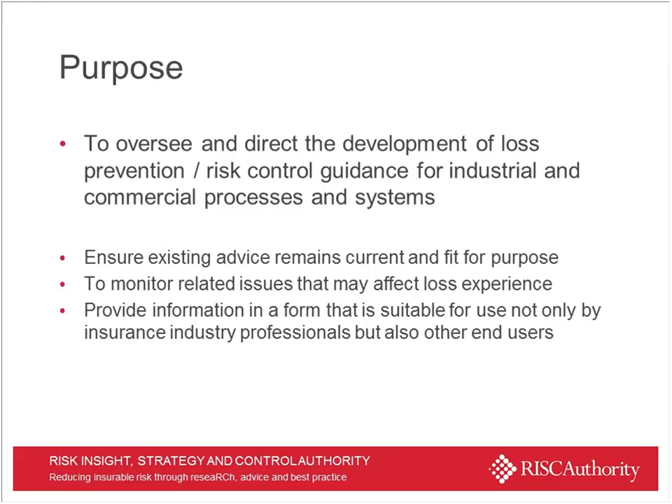Within the existing suite of documents that we have, there's around 57 current documents at the moment, numbered anywhere from 1 to 63, which seems a little bit strange, but the anomalies are due to a whole range of different things: numbering inconsistencies where we've renumbered some documents, and other titles that have been withdrawn or superseded and replaced. I've just got a few examples here.

RC2 was called Builders and/or Contractors Operations, and was last published in 1980, and the Joint Code of Practice for Fire Prevention on Construction Sites has very much superseded that.

RC20 A, B and C - a decision was taken that we didn't like A, Bs and Cs in particular in documents written in the past, so they've been renumbered as RCs 55, 56 and 57.

RC6 on the storage, use and filling of LPG in containers was withdrawn, and that's been replaced by another series of recommendations. And then we also have some other strange anomalies.

RC22, RC23 and RC24 just do not appear to exist. Now, if there's any old hands out there who may have copies of such documents, we'd be delighted to see them and find out what they were about. But everything we've been able to track down from our own records and from those we brought with us from LPC back in the dim and distant past seem to indicate that they don't exist.

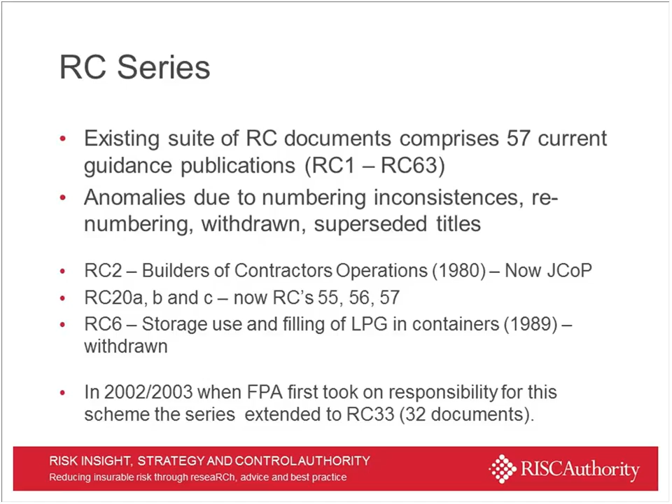Now, they're not hard and fast rules. Every insurer has the opportunity to append, amend, or do whatever they like with the documents if they choose to, and even if they, in some cases, tend to ignore them and just plough their own furrow, which is absolutely fine. But at the end of the day, we have some very, very useful guidance, all freely available, which hopefully the world and his wife can make best use of.

We also do other bits and pieces which fall outside of, I suppose, the direct risk control publications.

I've just highlighted a few on the screen now. One of the principal documents we're responsible for is the Joint Code of Practice for Fire Prevention on Construction Sites—one of the most widely used of our publications, and one we have to tread very carefully with. It's published jointly with the Contractors Legal Group, who used to be the Construction Confederation.

Yes, that is correct. They used to be the Construction Confederation, but they represent the contractor side of the market, alongside RISCAuthority representing the insurer side. There's an awful lot of liaison that goes into reviewing and updating that document to make sure it continues to meet the needs of both sides.

We have a business resilience guide which we published, that's now sitting with the business continuity working group, which Dominic convenes. We've got a code of practice for the protection of empty buildings, which we developed. There is fire risk management guidance for the food industry, published jointly with the Food Industry Panels Group. And we did a briefing note on e-cigarettes.

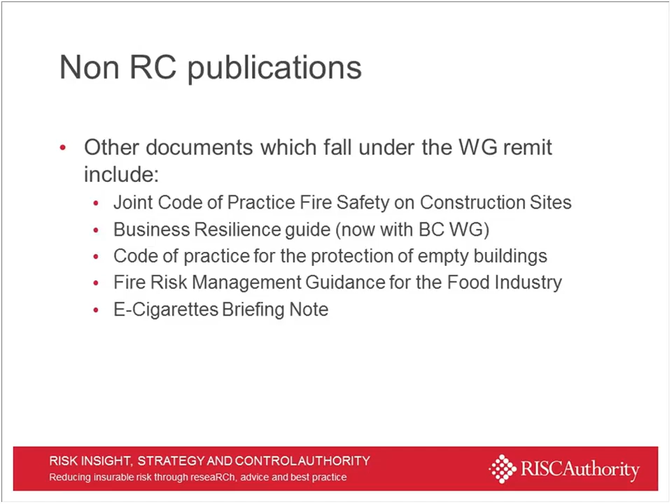We've worked with BSRIA on the extract duct cleaning risk control document. We've worked with BAMA on aerosols, BAFSA on the Legionella document, CFOA on the Photovoltaics document and on the Fire Detection Alarm Systems document, and also with London Fire Brigade on the document we produce on acetylene. So we try, wherever necessary and possible, to consult on these documents with the right organisations—not the world and its wife, but the right organisations—because we think that really strengthens what we publish in the end.

The document is really there as an aide-memoire for the steering group, so they can see what's current, what's not, what's going out of date, and what may be in more urgent need of attention. It's beautifully colour-coded just to make it nice and simple for me, which is always very helpful. It also allows us to respond promptly to emerging issues, because we can look at where we are with certain things, what the programme looks like moving forward, and ensure we're tackling things in a timely way.

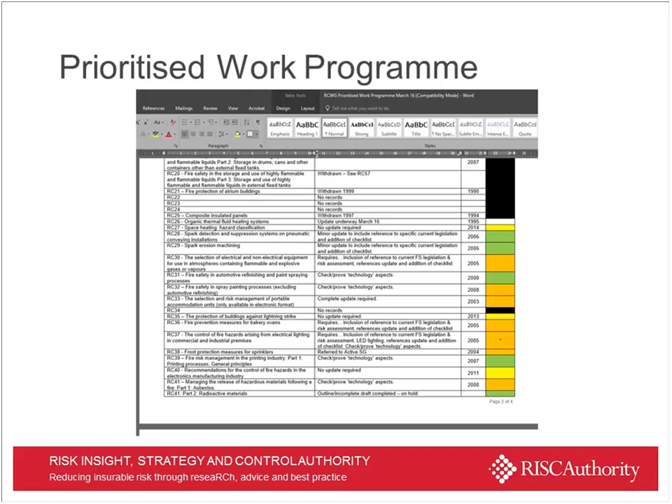One of the real difficulties that we have, although I think we manage it reasonably effectively, is balancing the need to keep existing RC documents up to date, whilst at the same time developing new ones that deal with emerging issues. So just looking very quickly at some of those we've been working on recently and have recently completed: fire safety with PV panels.

I'll be talking in a little more detail about that momentarily. That's correlated with the current IET guidance. There are also recommendations for minimising impact of Legionella on firefighting systems, which I mentioned earlier, and recommendations for storage, use and handling of industrial gases and cylinders. That's recently been updated and was passed for press this week, as was a revised version of RC49, which deals with acetylene cylinders involved in fire.

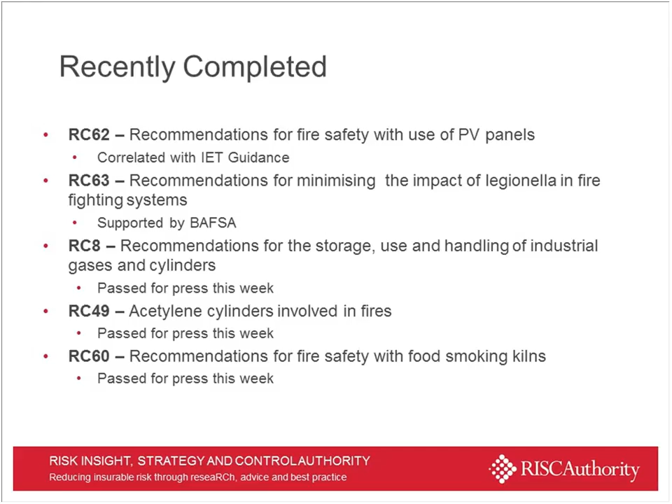And again, I'll touch on that a little bit later. Then we have RC60, which is recommendations for fire safety with food smoking kilns, and again, that's another one that was passed for press just this week.

Other documents that remain in progress, both new and those existing being updated: we have fire risk assessment of catering extract ventilation that needs to be amended to reflect changes recently made to what was HVAC. They're now called the Building and Engineering Services Association, but they have a publication called TR19, which is a sort of industry bible. So we need to reflect within RC44 the changes that have happened there. There's one other issue which I'll touch on in a moment.

RC64, manufacture, storage and use of biomass fuel pellets. We've approved the proposal for that, but we've yet to start any work. One of the issues is that we're waiting on the publication of an ISO standard, which we need to tie this into, and without it we'd probably be taking a bit too much of a punt, really.

We've got a document for fire safety in 3D printing. We've looked at the initial draft internally, and that's just being updated before the working group get an opportunity to review it formally.

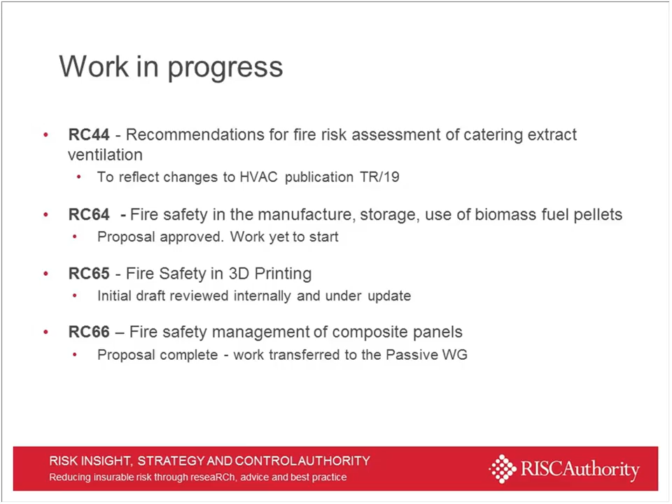And then RC66, shed a little tear for this one, an idea that was proposed by the risk control group, but has now been sucked away by the passive working group to develop. I'll touch on that very briefly a little bit later, just to rub in my indignation.

Okay, other documents in progress and documents that we've prioritised for update. RC26, Organic Thermal Fluid Heating Systems, bit of a mouthful, but not one of the longest titles we have.

RC15, Use of Portable and Transportable Space Heaters. 37, the Control of Hazards from Electrical Lighting. And then RC61, which is a relatively new document in real terms, but it covers recommendations for battery hazards.

But it's been suggested that it probably needs another look, on the basis that issues with regard to lithium battery hazards seem to have become more prevalent recently, and you've probably seen some of the news reports and videos that have come out.

So we're just looking at the need to update that to make sure it's current and remains fit for purpose. And then there's one new document proposed quite recently, which was fire safety with electrical cables, also considering firefighter safety. We looked at that proposal at our last meeting and agreed a way forward with it.

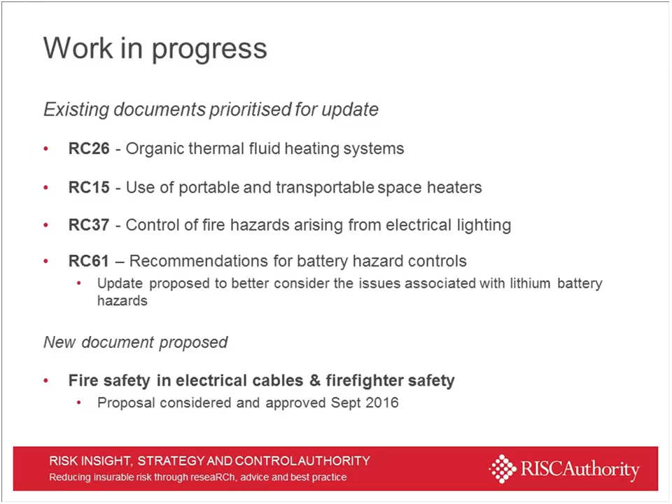Some of the other bits and pieces that we're involved in, not just production of documents: kitchen extract ductwork cleaning has been something of a concern for the steering group for quite a while, and we published a document on fire risk assessment for cleaning of extract ductwork, particularly from kitchens, which I referred to on an earlier slide.

However, we've been working with Loss Prevention Certification Board towards a certification scheme for extract ductwork. Progress so far: they've done all the research trials, they've developed the draft document, it's been out for consultation, and they're now just considering internally the validation of that document and its availability more widely.

I'm sure you're all familiar with the concerns associated with kitchen extract ductwork and fires therein. We're aware that there is an existing scheme for certification of cleaners of kitchen extract ductwork, which is held by the Building and Engineering Services Association.

However, research done outside of RISCAuthority indicated that a number of fires caused or resulting from build-up of grease in kitchen extract ductwork were as a result of poor cleaning done by some members of that particular organisation, and so the decision was taken to look elsewhere for developing a better scheme.

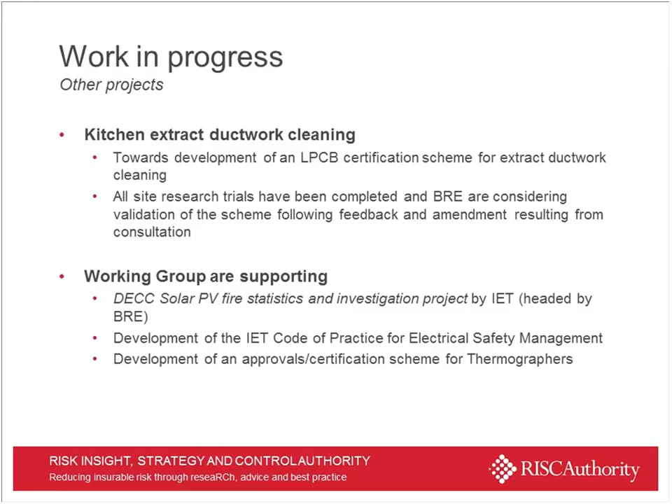Okay, so moving on from the generally good stuff that we do and how we do it, I just wanted to take a quick look at some of the more recent documents that we've published and those that we're working on at the moment, just to give you a feel for exactly what they are and what they cover.

I'm not going to go into too much detail, but hopefully give you a feel for each of them. RC62 covers recommendations for fire safety with photovoltaic panel installations. This was really developed on the basis that while the government were offering such great tariffs for the sale of electricity back to the grid, it became a very popular installation, and the work was being undertaken by rafts of people who may not necessarily have had the right qualifications, experience or competency, and there was very little guidance available to support them and the end users in ensuring their installation was fit for purpose.

I think it's given us an opportunity to look around the issue in more detail and come up with some really good guidance that supports not just their design and installation, but also their ongoing management, and also considers the risk to firefighters, which I think is very important as well.

So it provides background information and guidance on the installation of panels on commercial and industrial premises. The recommendations may be just as relevant to some larger domestic installations, but primarily it's focused on commercial and industrial premises, and looks at things like location and fitting, electrical safety, particularly where it has an impact on the prevention of fires, the mitigation of threats to life and property loss, and also business interruption. Safety of firefighters, as I mentioned earlier, particularly associated with the direct current side of the installation. I'll touch on that in more detail in a moment.

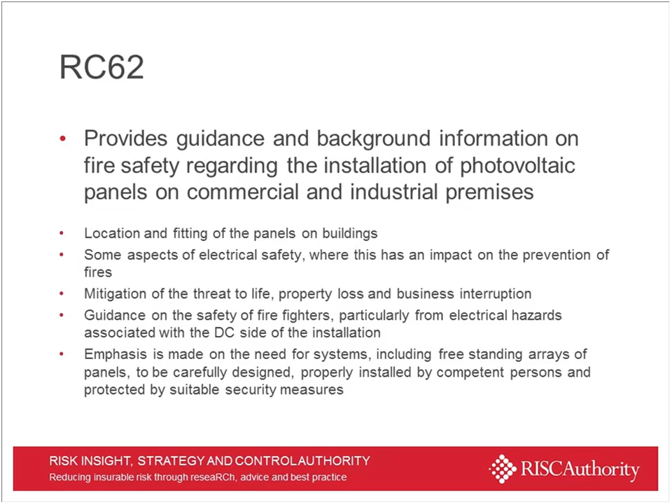There's also an emphasis on the need for systems, including freestanding arrays, because they're not always installed on buildings, but sometimes on large rural sites, to be carefully designed, properly installed by competent persons and protected, because clearly the panels are worth a few bob, or certainly the materials they're manufactured from are.

Some of the key points around planning, for example, is to review existing fire risk assessments, because just putting a series of panels on the roof of a building may not seem to be a particular issue from a fire safety perspective. If the fire risk assessment, which is driven by life safety requirements, doesn't address them, then it probably needs to - not just because you're putting stuff on the roof which may impact firefighting, not particularly a concern from a life safety means of escape aspect, but certainly if you're going to start drilling holes in buildings to run cabling, or breach compartment walls or compartment lines, then that needs to be addressed.

There's also a recommendation to review any assessments made under the Dangerous Substances and Explosive Atmospheres regulations, on the basis that the installation of PV is going to require consideration, particularly with regard to the zoning of the site and the use of EX-rated equipment.

When it comes to design, obviously economics would recommend the largest possible installation, but we felt it was appropriate to make sure that where they're installed on roofs, adequate access is maintained for maintenance and any other works that need to be done on the roof. It's great to cover your roof with panels, but if you can't get up there to maintain them or do any essential maintenance to the roof of the building, then clearly that's going to cause problems.

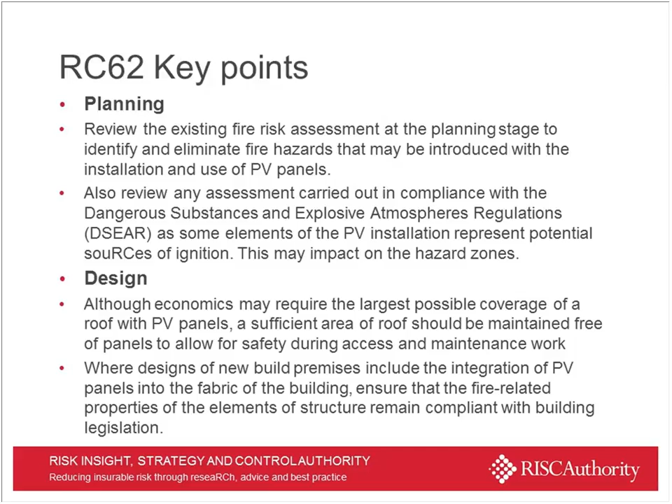When it comes to safety, provision of a switch in a prominent location which is easily accessible so that firefighters can disable or isolate the DC side of the panel system, to ensure their safety in real terms.

Also be aware that the panels produce current not just from daylight but also from other light sources, such as street lighting or flood lighting. There were a number of instances where installers working hard to install as many installations as they could while the feed-in tariffs and government funding were good, worked all hours using floodlit sites. Some were unaware that flood lighting will also create a DC charge through the panels, and a number of people got hurt as a result.

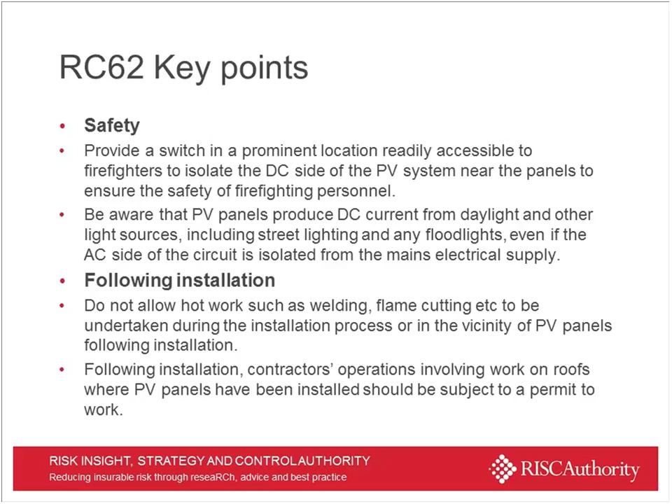And then, following the installation, recommendations with regard to hot work - any work on roofs should be subject to a permit to work system, for obvious reasons.

Some of the other issues addressed in the document: ensuring that unprotected cables and the panel arrays themselves don't straddle compartment walls. So if you've got a compartment line running up through a building with appropriate fire breaks at roof level, you've got to ensure we're not bridging that gap with the installation of panels or cabling.

Consider during the design phase, if you're installing large panel arrays in agricultural land or any external ground location, that the site's not likely to flood. Also consider roof loadings.

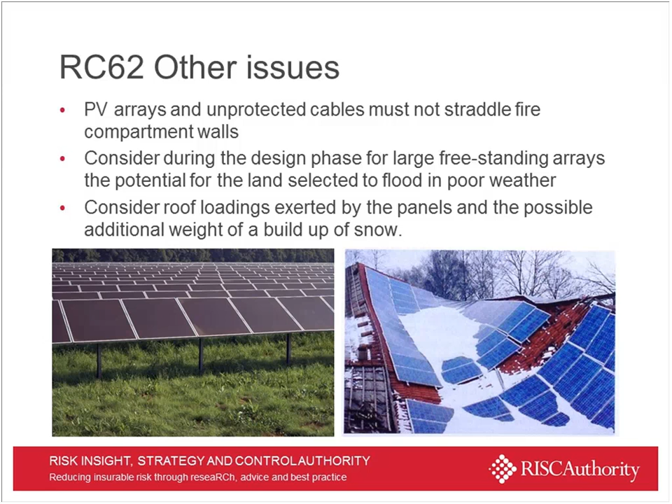Just adding panels to a roof may be enough to cause it to collapse or at least weaken it. And certainly if it snows, that can add additional load, which, as you can see from the photograph on the right-hand side, caused this particular roof to collapse.

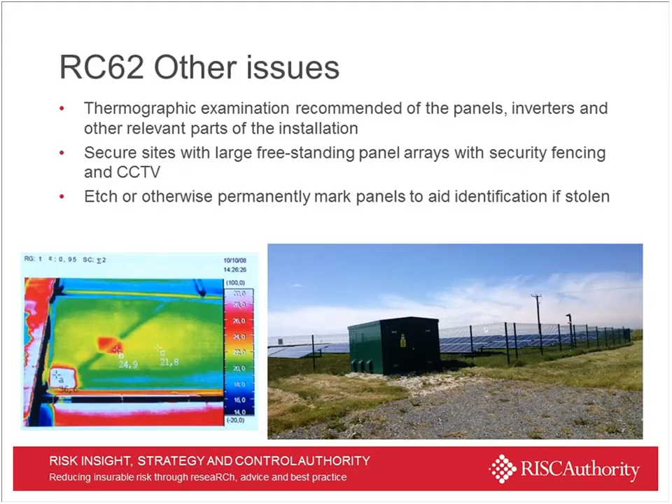We've recommended thermographic examination, as you'd expect, not just of the panels but the inverters and other relevant parts of the installation. Securing large sites with freestanding arrays using security fencing and CCTV, and also marking panels to aid identification if they're stolen.

When it comes to the fire and rescue side of things, we've also got to consider the fire resistance of the building and the potential for firefighters to get hurt and their ability to tackle the fire effectively. We talked earlier about the potential for banging holes into the walls of buildings and the problems that can cause by allowing fire to spread internally.

But externally, if you're piling panels on your roof, a firefighter squirting water onto it is just going to find the water bouncing back away from him, not necessarily getting to where it needs to get to. So we have to ensure there's appropriate access and that information is provided to the fire and rescue services so they know what they're walking into.

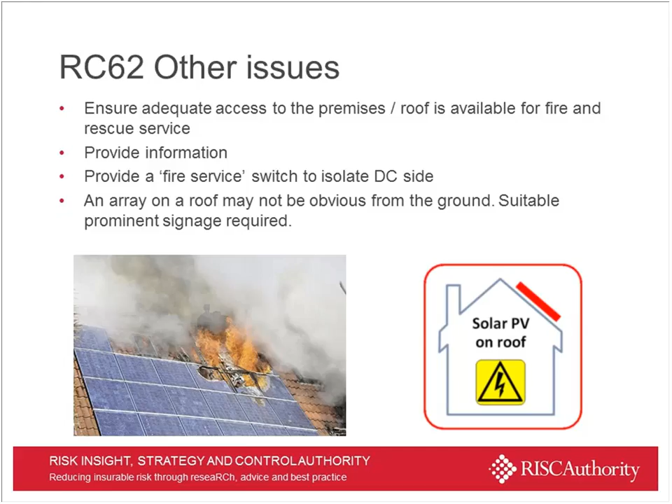Providing a fire service switch to isolate the DC side, as was mentioned earlier. And because the array on a roof, particularly a flat roof, may not be obvious, providing appropriate signage so they can easily and quickly identify that there are PV panels on the roof.

So a quick run through of that particular document. I'm going to look very quickly at where we are so far with RC60, just passed for press.

This covers fire safety with food smoking processes. Quite obscure - I wouldn't suggest it's an interesting read, but like most of our risk control documents, if you don't need them for the technical content, they're a surefire cure for insomnia.

But these recommendations are simply about providing advice for food smoking, both in modern factory settings and also with traditional kilns. Again, we're talking about the more industrial side of the market than the local home smoker - not sure if that's the term you'd use, but I've made it up if it isn't. It's just about good management of a process that involves the generation of smoke.

You might think there's not too much to worry about there, but from a fire safety perspective and the potential for false alarms, clearly if you've got smoke in the workplace, you've got problems that need to be considered.

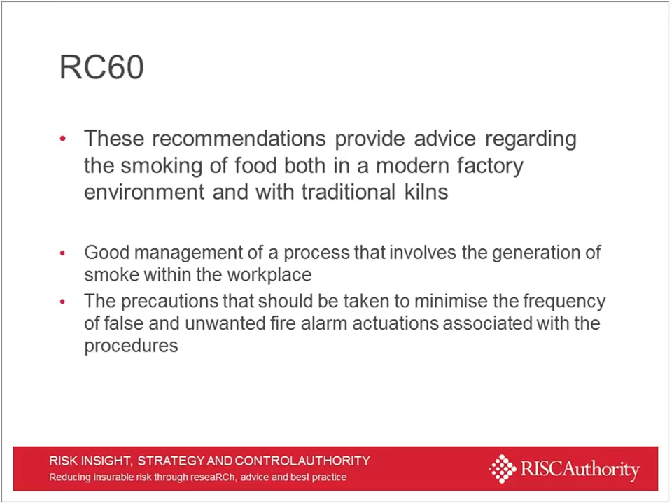A diagram there shows the essential elements of a smoke box. I don't think all of them are necessarily in a configuration that you'll always find, because in some locations you're going to have heating elements that sit beneath the smoke box itself. But you can see from this layout, and this diagram's reproduced in the document itself, you produce some smoke, pump it through a chamber where the foodstuffs are hanging, then you suck it out and blow it away, in the simplest of terms.

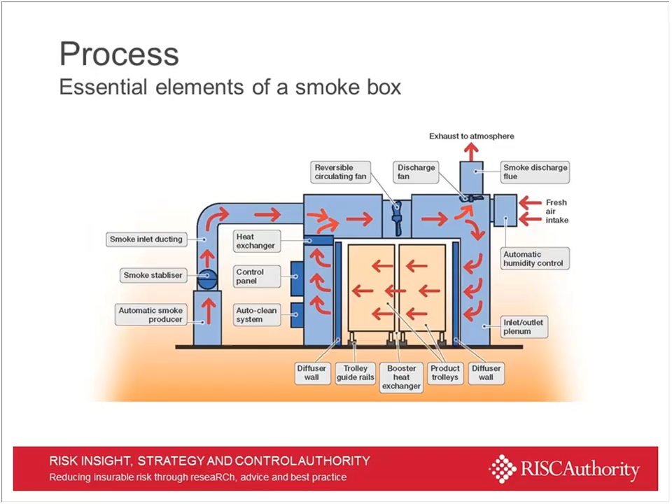In this configuration, you've got fans which can work in either direction, either to bring fresh air in or extract and exhaust the smoke to atmosphere once it's not required. So relatively straightforward, but that's an indicative layout, not necessarily what you'll find everywhere, but at least it gives us a bit of a feel for how these things function.

The key points are about compliance with the law, not just a traditional life safety fire risk assessment, but also considering the potential for explosive or flammable atmospheres if carbon monoxide is given off through the storage of fuel pellets. And then looking at business continuity, making sure that you've taken all the necessary steps to manage and maintain the premises so that it remains safe and business can continue even in the event of a problem.

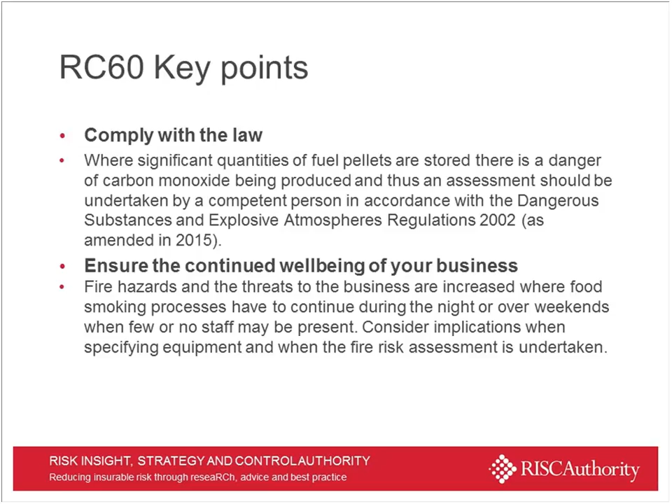With smoking processes, some of them do continue while premises are unattended, overnight or at weekends, so implications in that respect have to be considered. We do have a risk control document number 42, which covers unattended processes, referred to a couple of occasions within this document to drive people towards some specific advice which will assist.

When it comes to the key points, the fire safety management issues, relatively straightforward, the sorts of things you'd probably expect to be there: keeping the stocks of materials in the processing area to a minimum, training of staff, locating the equipment preferably in a separate fire-resistant compartment, and agreeing the fire rating of that compartment with insurers.

Where you've got fuels, you should be storing those outside the building and only keeping sufficient materials inside for what you need on a daily or shift basis. And when it comes to the ductwork, exhaust flues and ventilation and such like, construct them suitably, making sure that you're not producing a grease trap, as there's not the potential for huge amounts of grease with certain types of processes, but with some others there certainly will be.

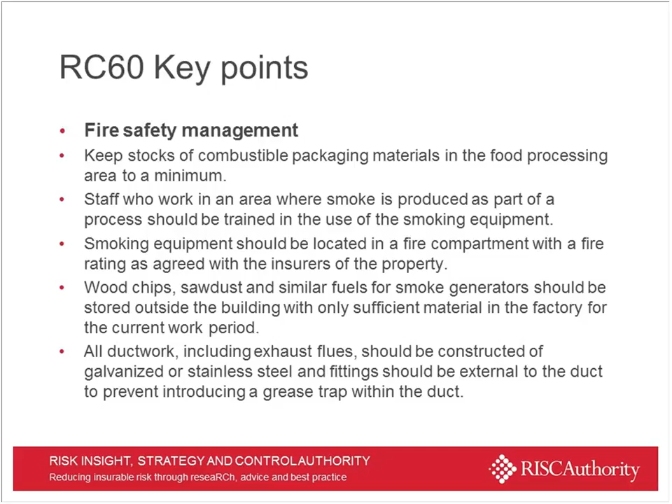And when it comes to the storage of the wood chips outside, if you're keeping quantities of them, you probably also need to consider the risks from self-heating and the potential for spontaneous combustion.

With traditional smoking kilns, where they're installed within a factory premises or built into a factory premises, they need to be located preferably on an external wall and open directly to the outside rather than internally. This helps to provide suitable subdivision. And again, when it comes to the fire resistance of the structure which surrounds them, recommendations are that the rating is agreed with the insurer.

It'd be nice to think it was relatively straightforward, but I think there are wider risk issues which need to be addressed rather than just prescribing something off the cuff.

Then with regard to fire protection, making sure that suitable detection is provided, ensuring that preferably multiple sensors are used, or those that are able to detect multiple phenomena, including smoke, heat and carbon monoxide, on the basis that what you want to try and do in a potentially smoky environment is reduce the potential for false alarm activations. Yes, the smoke box might be shut most of the time, but on opening the doors there's bound to be a release of some smoke into the wider workplace.

Having high temperature alarms in ductwork, exhaust flues, the smoke generator and the smoke chamber, just to make sure that if there is an incident, a fire or any significantly increased temperature, that's addressed quickly.

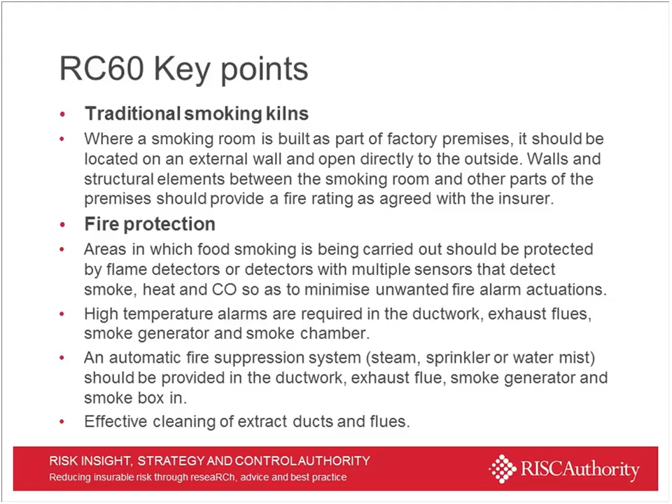Again, the build-up of grease may be very different depending on what's being smoked and the process, because cold smoking will produce far less than hot smoking would do, but it still needs to be considered in the round.

The third document to talk about is RC65, Additive Manufacturing, I've titled it. But as you'll see from the image, what we're really talking about is 3D printing. This is one of those emerging technologies that the steering group felt it was right to address now.

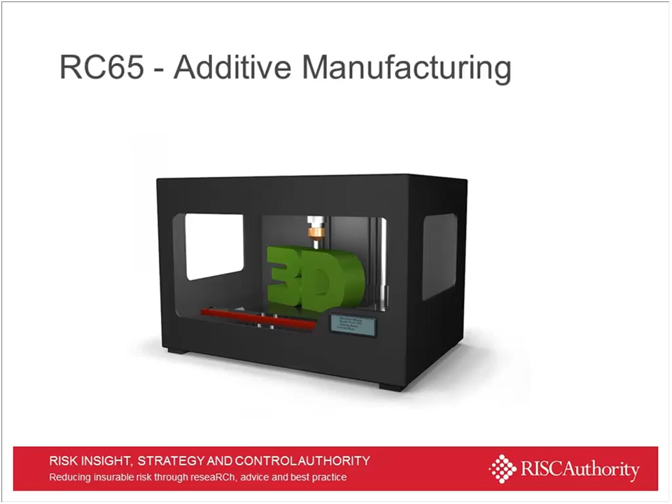Now, with any new document of this nature, there's a decision to be made. You recognise that you're producing something that's correct for a moment in time, but where there's a technology that's moving quickly, you also have to realise it might go out of date very quickly as technologies emerge. But 3D printing's been around for quite some time, and some of the technologies are quite well developed and advanced. But it is one of those documents we will need to keep on top of. If we were to leave it as just a generic type document, it would cover very little more than what you do with an unattended process involving electricity and combustible materials. But I think the document's going to develop to consider some of the specifics associated with the different types of processes, and I'll touch on those in a few moments.

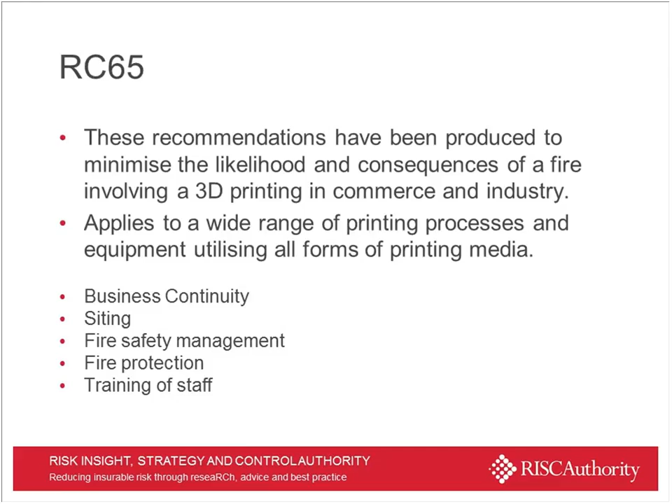The document covers business continuity, siting, fire safety management, fire protection, and training of staff as the principal issues. But looking at it in more detail, what's the process about?

Well, originally 3D printing, or additive manufacturing, described a process that deposits a binder material into a powder bed with an inkjet printer head, layer by layer. More recently, the term's been used to encompass a far wider variety of additive manufacturing techniques. They generally, nowadays, build components by depositing thin layers of material and fusing them together by heating, often by the use of lasers. The building material is typically fine, such as powdered metals, plastics, ceramics or glass. But the technology used by most 3D printers today is fused deposition modelling, where you're building something from the ground up on a flat bed, although there are other ways of doing it, and this deposition modelling is a special application of plastic extrusion.

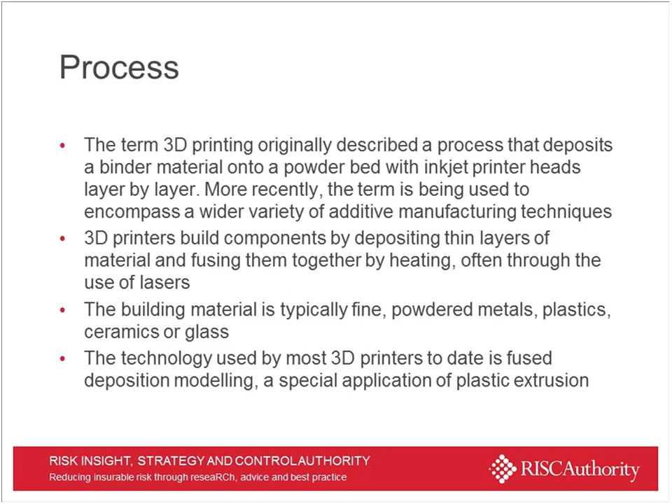Using edible materials, even for some manufacturing, but there are also products like metal alloys, powdered polymers, titanium alloys. So using powdered metals, using powdered plastics is obviously going to cause the potential for significant risk from something quite obtuse like a dust cloud explosion if the materials are allowed to mix freely with air, and so those sorts of things will also need to be addressed. Under robocasting, or direct ink writing, they use a product in some circumstances called Cermet, which, as the name would suggest, is a composite of a ceramic and a metal. Not necessarily a space age material, but certainly one they're thinking of using to line spacecraft to shield them from debris, but more traditionally used in producing electronics, electronic resistors and capacitors and such like.

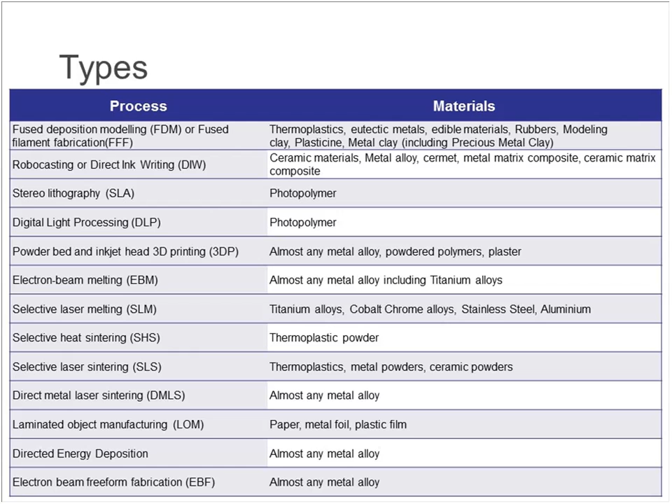So clearly, if you're using powdered metals or powdered plastics, there is the potential for dust explosions. There might be the need to hazard zone the space, and the need to use EX-rated components. If somebody's installing a new 3D printer into their premises, is that the kind of thing they're likely to consider? Maybe not. Principal risks are, because it's an unattended process, the potential for malfunction of the machinery itself.

As a steering group, we had the opportunity to go and look at some 3D printing equipment in Brackley, where an organisation were using it to support the F1 racing teams in that location, and it was interesting to see some of the plastic extrusion work they were doing there, where the print heads, if they malfunctioned or if the print head hit the product it was creating, it would send it into a bit of a tizzy, to be perfectly honest, and eventually it would just produce spaghetti, which it splayed about through the print space, and so that needs to be watched for.

Concerns with regard to the printing medium, which we just discussed, and its storage, not just its use. And then there are associated processes which also need to be considered. We saw in our site visit that the process can often use two different materials in printing. So you're printing with the product that you're trying to create the object out of, and then you're also printing with a support material which ensures that the product is stable during printing and doesn't fall over, which could also be another cause for the spaghetti-like explosion that occurs with this particular type of printing.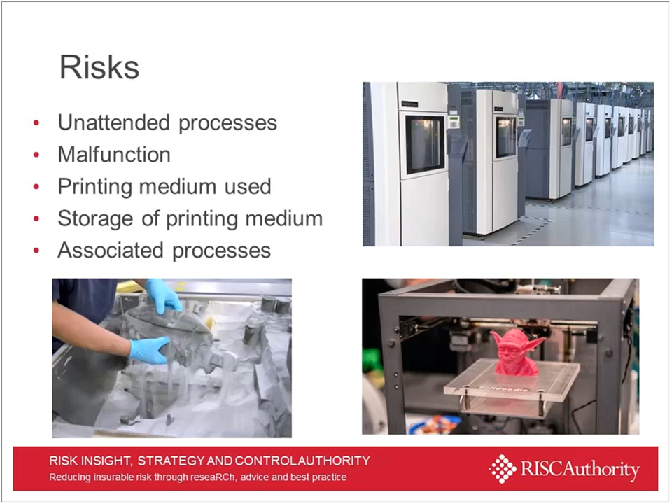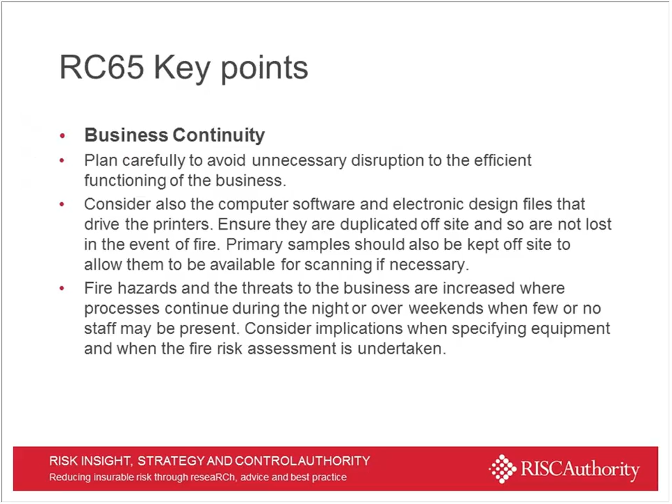Some of the key points are focused on business continuity, not just for the equipment itself, but also for the computer software and the computer files which drive the sites, making sure you've got copies held off-site, and making sure that as an unattended process you're addressing the risks associated there effectively.

From a fire safety management perspective, relatively quite straightforward, but making sure the machinery is functioning effectively before you leave it to run unattended. Thinking about earthing and bonding, where there's a static electricity risk where you're pouring and transferring powdered materials, or even liquid plastics.

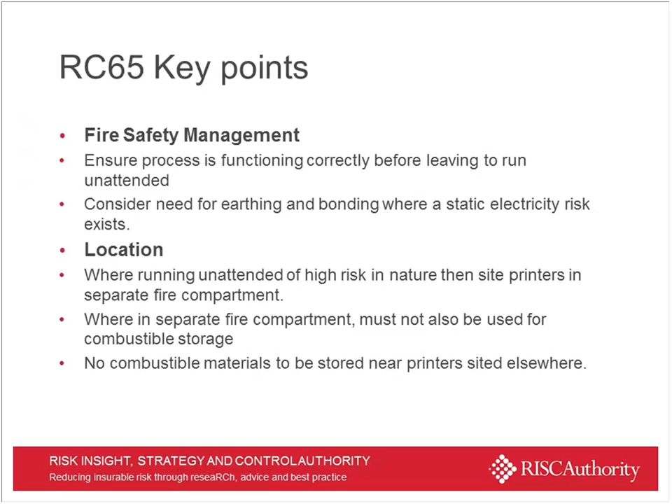And then their location, effectively siting them, compartmenting them where possible, and making sure you're not storing combustible materials in close proximity. When it comes to fire protection, again, making sure you've got a suitable fire detection alarm system linked

to a receiving centre if the process is left to run unattended, and making sure you've got suitable suppression, not just in the work environment, but that's going to cover the potential for a fire within the space itself, but also making sure that you're detecting that effectively, depending on the nature of the risks that are associated with that particular printing process.

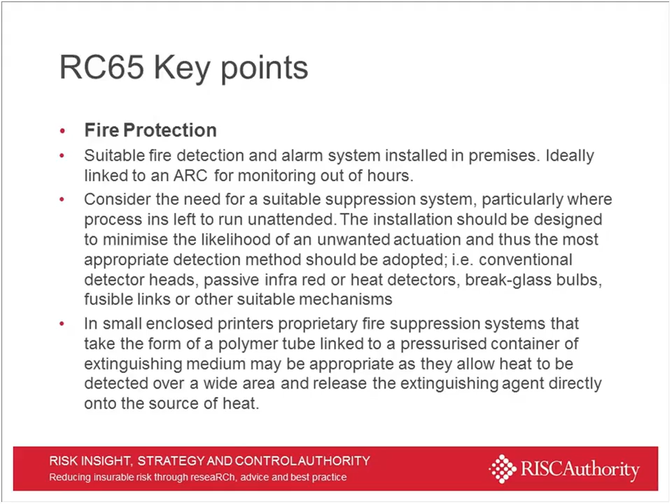But in certain smaller and enclosed printers, you might be able to install a proprietary system that delivers an extinguishing agent locally, which is obviously going to do less harm in broad terms across the site.

RC66, I mentioned this earlier. This is the document that's been stolen away from the Risk Control Steering Group by the Passive Working Group, and probably quite rightly. I'm being a little bit unkind.

But it's to do with fire safety management of composite panels, not just their design and installation. It's thought that within the existing suite of documents that we have within RISCAuthority, although we talk about composite panels and their use in quite some detail in certain locations, particularly within design guide type documents and such like, there's nothing really which addresses the issues associated with design, installation and their ongoing management.

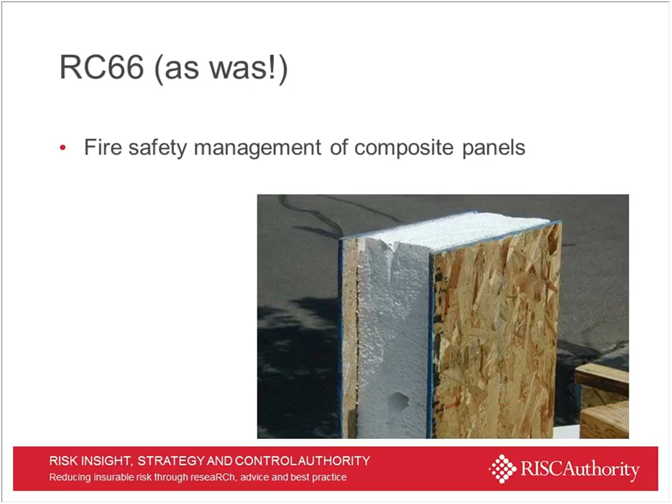And so this will be a really good addition to the spectrum of work. The principal issues that the document's going to consider: whole life considerations, so from their selection, their installation, and their management and demolition. Looking at stability and the factors which may impact on a dynamic risk assessment done by a fire and rescue service if they need to tackle a fire in the location.

Giving an indication as to how you can identify what the panel contains by way of an insulating material - not always the easiest things to identify. And then looking at hazards arising from their design and potentially the quality of construction if they've been done particularly badly. Looking at joints and corners and thermal bridging and those sorts of things, and other issues associated to their delamination.

It's not uncommon in food industry premises to find ceilings created from panels and them to be walked across quite frequently to access services and ductwork and such like. And they very, very quickly become damaged if they're not properly protected.

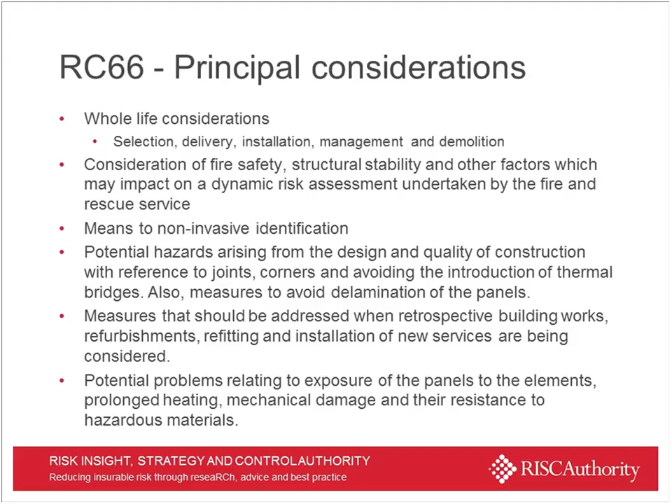And then also looking at issues associated with any sort of maintenance work, or where the panels need to be punctured to allow for the installation of services, and making sure that where that's done, it's done effectively, it's done safely, and that the resultant repair is done in such a way that it's going to protect the panels going forward.

One other document which I mentioned earlier is with regard to electricity and firefighter safety. I've not given it a number yet - I'm not quite sure whether the Passive Working Group want to use the RC66 name, or whether they're going to give it their own title. Dominic's pulling faces and nodding, suggesting it will not be RC66 for very much longer, but for now it's RC66 moving forward.

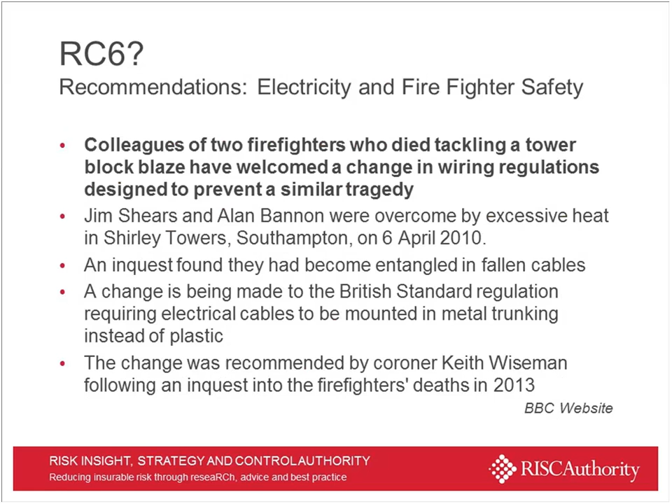A fire in 2005 in Stevenage, a flat fire on the 14th floor, resulted in the death of a firefighter because the plastic trunking melted, the cables descended and trapped them. Particularly dangerous, obviously, in a smoke-filled environment where seeing where you're going is absolutely essential.

The principal issues we've highlighted for consideration include: management of mains electricity, routing of cables, periodic testing and inspections, as you'd expect, and then some other electrical safety issues that may need to be considered, including panel installations and battery-powered systems, alongside the installation of the cabling itself and how it all functions.

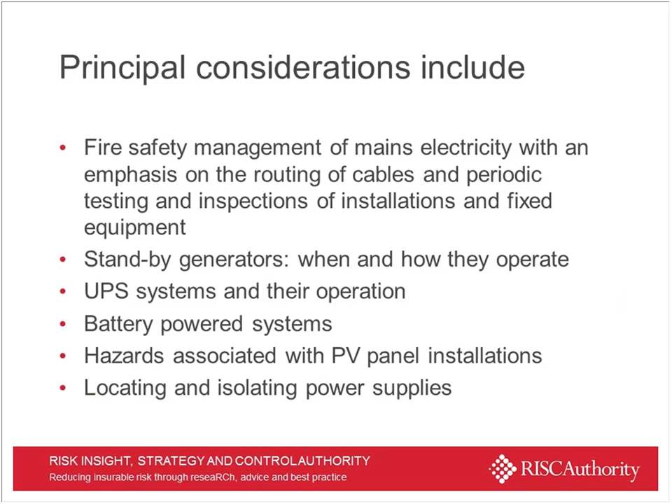Two other documents have recently been updated. These have just been passed for press, so you should be receiving hard copies soon, with electronic copies available sooner. RC8 has been updated just to make sure it's cognizant of current legislation and best practice.

RC49 has also been addressed. For those familiar with the document, you'll remember it previously dealt principally with business continuity type issues, on the basis that if you have a fire involving an acetylene cylinder, the fire and rescue services will put a 200-metre hazard zone in place and stop you going in for the best part of 24 hours. But it was decided the document needed to be more detailed and cover all the risks associated with the use and storage of acetylene. So it's a fairly major revision, but that will be out shortly.

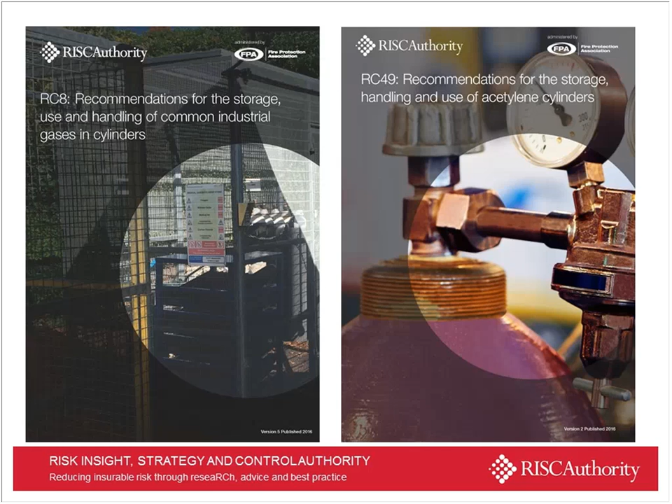Just a few other things in wrapping up. A reminder that all of these documents are free to download from the RISCAuthority website. If you don't receive printed copies, you need to speak to your RISCAuthority representative to make sure they're getting additional or sufficient copies for everybody. But they are free to download from the website, and in doing so you'll make sure you've got the most up-to-date publication on every occasion.

We've been discussing the potential for keeping some documents where technology changes quickly, such as with 3D printing, having a published copy now and then updating the online copy as needed. Obviously we'll inform everybody when it's been updated, but at least we'll know we've got a document that's fit for purpose and touches on all the key issues going forward. There's a list of everything the library contains.

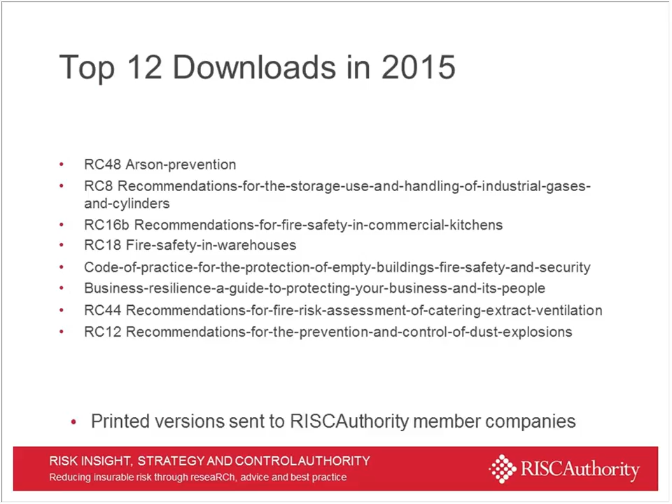Top 20 downloads, or top 12 downloads in 2015 - Dominic extracted this data, and I think he's in the process of extracting more up to date figures. From a risk control working group perspective, these are the top 12 downloads, and most of those appear within the top 20 of all downloads from the RISCAuthority website. RC7, recommendations for hot work, is the most popular document - I couldn't say by far, but it's certainly at the top of the list, and we all deserve a good pat on the back for that.

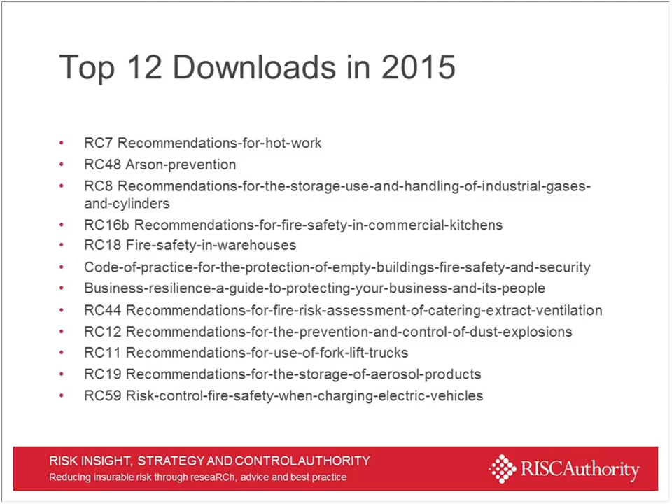One of the things that's absolutely key to us going forward is suggestions for new guidance, and eyes and feet on the ground, as it were. We've got broad engagement from insurers on the steering group, and that ensures we keep up to date with what's changing, what's moving, what needs to be addressed, what we need to tackle next, what's emerging as an issue we need to deal with. But we're always open to suggestions.

So if you've got any particular suggestions for documents that need updating or adapting or augmenting, or for emerging risks you're identifying out and about, or that customers and clients are reporting to you, please feel free to push them through to us. They'll be discussed at the next risk control group meeting, and decisions taken on how we move those forward. Email RISCAuthority, or riskcontrol@riscauthority.co.uk, a monitored mailbox that both Dominic and I and others have access to. So if you have any bright ideas, please drop us a line, or look for our phone numbers and give us a call for a chat.